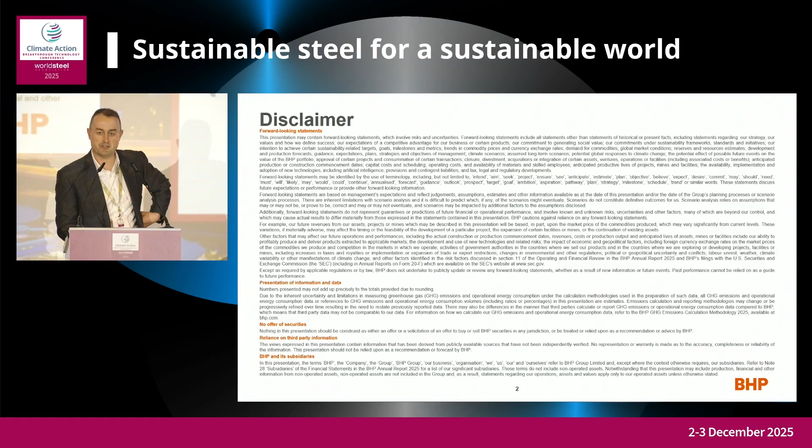In terms of why BHP is involved in steel decarbonisation, we see that we have a contribution to make as a reliable, sustainable, and important supplier to the market. We have a role to play. We have a deep understanding of how iron ores and steelmaking coals perform in the iron making and steelmaking process. But at the end of the day, we're not a steel producer, so we can't actively or directly influence steel production emissions. So we are taking a partnership approach, and we have a way to contribute to these reductions in steelmaking emissions downstream in the value chain from our operations.

So we've set 2030 goals around supporting technologies, developing technologies, and working with our partners to show how we can de-risk and support commercialisation, which is probably going to happen post-2030. We also have a 2050 goal in the steel value chain, which is more directional. But importantly for BHP as an iron ore and steelmaking coal supplier, we want to understand the technologies that our customers will be using in the future and how to keep our raw materials relevant and value-adding in our customers' processes. So to work on this, we've structured a program that you can see laid out on the right-hand side. The partnership theme sits across all of those approaches.

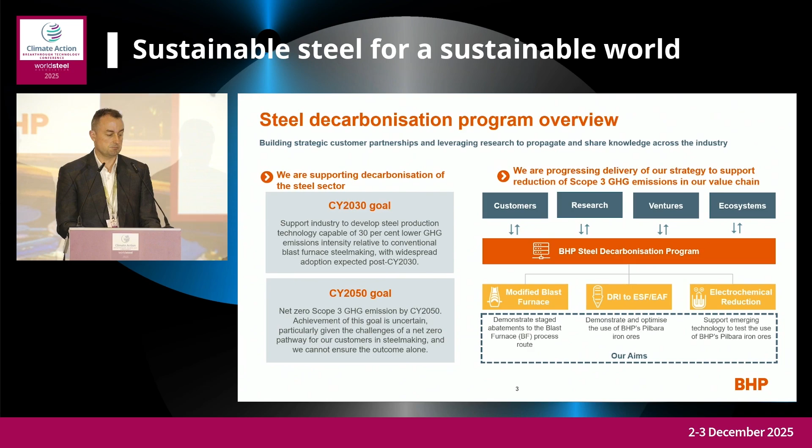In terms of those pathways in a little bit more detail, we have basically broken them down into three categories. The modified blast furnace, which is decarbonising the existing process route through the use of CCUS in particular. We have the combination of direct reduced iron using our Pilbara iron ores and electric furnaces, particularly the electric smelting furnace, which you've heard a lot about. And lastly, the electrochemical reduction process route, which is more transformative, probably longer term, but we really see it can play a role, particularly if you consider these multiple pathways have different economic pros and cons in different regions with different contexts around energy, raw material mix, and regulatory environments.

So I think it's been really pleasing to see that multiple pathway thinking across the last couple of days, and our program is certainly set up to reflect that. And we see all of these pathways have that roadmap towards a near zero CO2 intensity of steel production. So it's not necessarily trying to achieve zero. We've got to recognise there are a lot of residuals that have to be worked on, but really getting down to what we see is 0.4 tonnes of CO2 per tonne of steel.

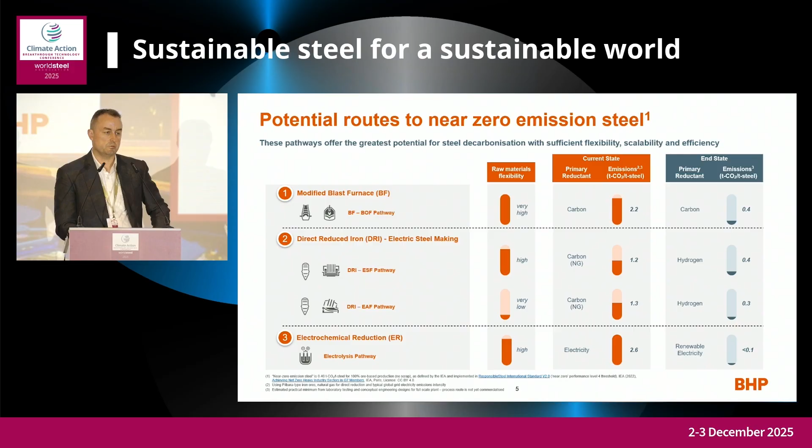And since we've set up the program in 2020, we've gone through phases of setting up partnerships, doing studies, doing lab test work, programs, and really maturing the program across those three pathways. And in some cases, particularly in the optimization projects shown across the top for the blast furnace, these projects are at commercial scale and delivering real emission reductions with our customers who are hosting the projects.

And that's why we build in the longer term demonstrations that are at pilot scale or smaller scale, like CCUS, and like the DRI work and the electric smelting furnace, which we're working towards pilot scale at the moment. We've also been working in electrochemical reduction to scale up different systems with our partners and understand the pros and cons of those different systems and the performance of our iron ores.

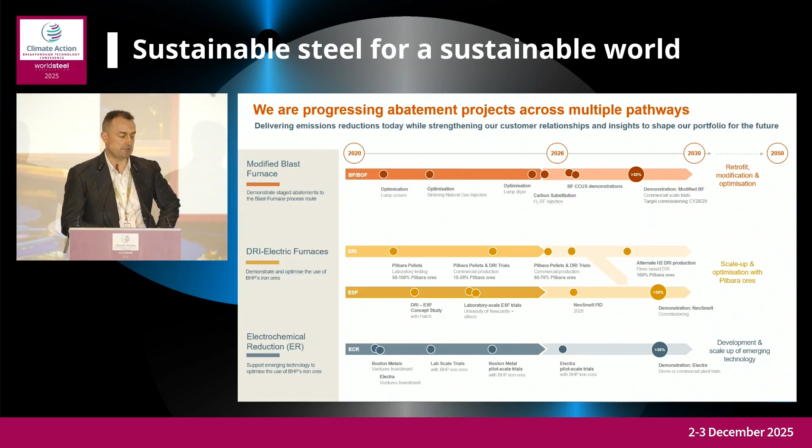Going into a bit more detail on some of those projects. For the blast furnace, I think this is now becoming a common understanding that the blast furnace pathway to that near zero intensity has the combination of technologies which include increasing energy efficiency, raw material blends, which includes higher quality coke, the greater use of lump and potentially pellets over sinter, to really step down that emissions by 10 to 20%.

Then you have the recycling or carbon loop effect of the top gas recycle back into the blast furnace to step down even further to about 50% reduction. But to really get down to that near zero intensity, you need the carbon capture and utilisation and storage. And within the integrated steel mill, there's multiple point sources that you can apply that to. Each have their own profile in terms of gas composition, impurities, and different technologies may or may not work. So it's important to understand where those point sources are and the cost and the risks around applying those.

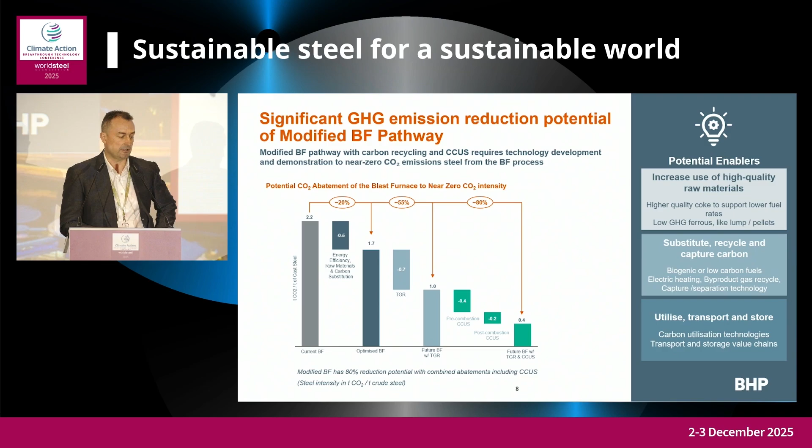We also have been doing research with our University of Newcastle team to look at if you're injecting hydrogen into the blast furnace in different stages there, what impact does that have on operations? So building more models to understand where the operating environment might be best for hydrogen, looking at the materials performance of coke and ferrous under hydrogen environments, and then trying to validate those at commercial scale through our partnerships with our customers. The example shown here is the Zenith project in China for coke oven gas injection.

And some early learnings coming through is really that high quality coke can play a key role in resilience against hydrogen attack. And then there's some trends in the ferrous burden RDI that we're seeing around the impact of hydrogen on pellet degradation versus sinter and lump, but we've got to understand that a bit further. Ultimately, we see the raw materials will play a role in decarbonising the blast furnace, and high quality coke is going to be very important as you're trying to reduce fuel rates significantly. So understanding the performance of that coke and the coals that go into it and how you generate that quality is important.

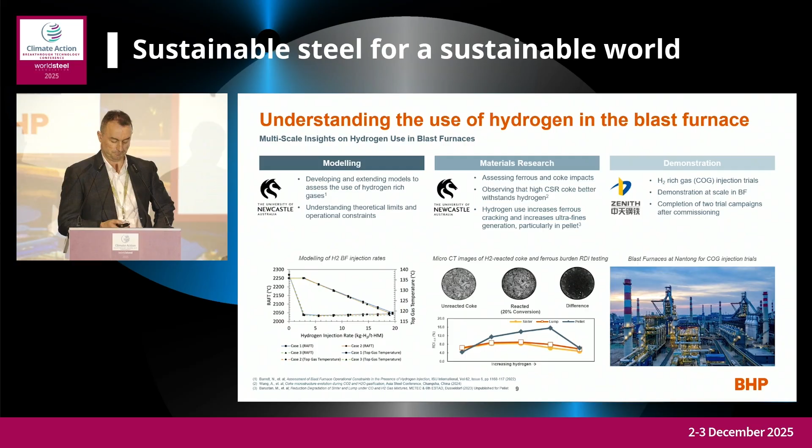Dipping into that Zenith project a bit more, we've got some initial results. The coke oven gas injection was constructed and commissioned recently after about a 12-month period. The initial trials being run by Zenith are very promising. We're seeing the coke rate coming down a bit and obviously leading to CO2 benefits. But it's still early days and they're still doing more trials to optimise that further around the application of which tuyeres and the injection approach as well. So hopefully with them I'll be reporting more results in the coming months around that project. But it's a good example of that real reduction in CO2 happening with our partnerships with the customers.

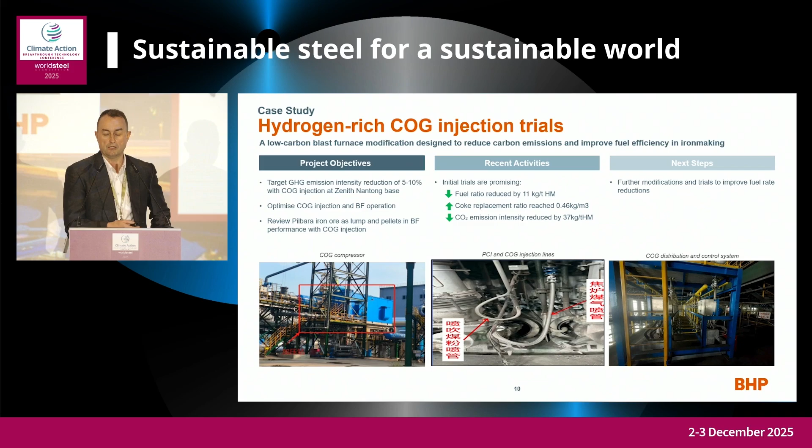In terms of carbon capture, I don't think anyone understands yet which carbon capture technology might work best with different point sources in the steel mills. So we're really looking at a range of technologies in our portfolio and at a range of different scales, trying to answer different questions, essentially.

So if we take the example of our project with ArcelorMittal and MHI at Ghent, it's a small pilot, but it's using conventional amine technology, which is proven at scale, but in chemicals or cement plants or power stations, not at the steel plant. And so we're really trying to understand the performance of the blast furnace gas capture with that technology. So it doesn't need a big plant, so it's very focused.

And we're hopefully going to be reporting some outcomes for that in the coming months. With HBIS, we have a slightly larger plant looking at PSA, again, a different technology, seeing how it can perform with the blast furnace gas. It's not just the static composition or the average composition, it's the impurities and the minor components of that gas, but it's also how it fluctuates during production periods as well that has impact on potential capture. And we're looking to really understand that.

Larger scale with JSW and Carbon Clean in India, we're doing a study at the moment for a larger plant. They're lucky enough in that region, there's a market depth for the captured and processed CO2, so they're able to look at a larger scale module there, and really that'll be a lead project for the industry, and potentially innovative carbon capture amine technology with a CycloneCC provided by Carbon Clean.

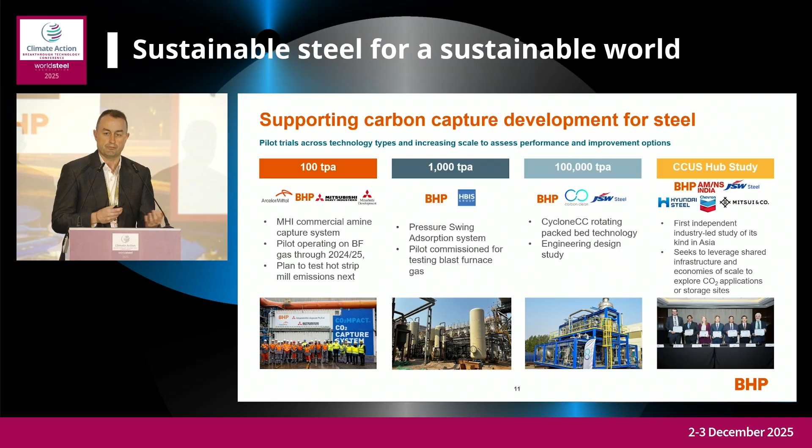So this hub study is helping some customers of ours in Asia really prioritize where those storage options might be and what levers are needed or what instruments need to be developed to improve the economics of that for CCUS to be a solution for the industry.

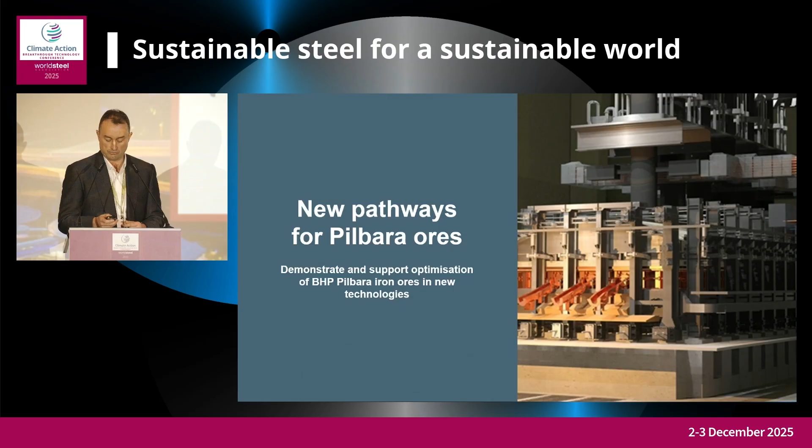I think as iron ore suppliers, we'd love the beneficiation to work, and we're always going to study new ways of doing that. But the reality is the gangue minerals are so well integrated into the iron matrices that you just can't liberate it. And you can spend a lot of energy and use a lot of resources to try and get rid of that. But ultimately, you're fighting nature there. So, of course, we'll keep looking at it, but this is the reality that we're dealing with.

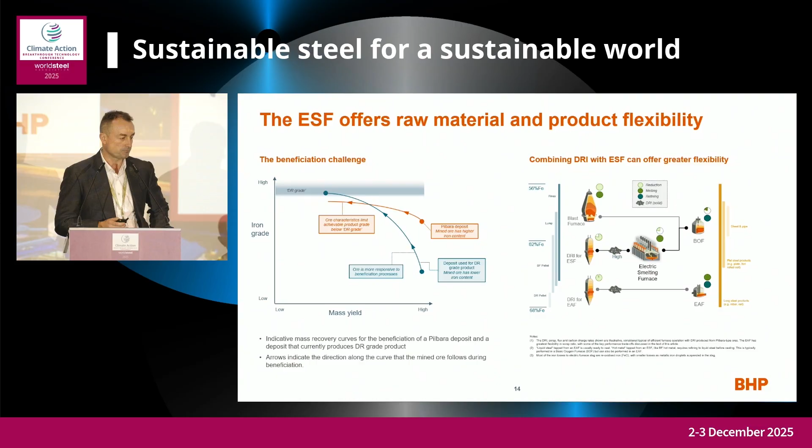There was some conversation in the last discussion around pelletizing, and we have been doing a lot of work around this. 5 years ago, we were told, and we had the same mindset, Pilbara iron ores can't form pellets. And there are some constraints, but like sintering, which has been the long mainstay of the process for the use of Pilbara iron ores, there are ways to improve the performance. And actually, we find that the steel producers in China are more readily growing the use of Pilbara iron ores in their pellets as a blend material.

Up to 40% in blast furnace pellets is kind of normal for some of our customers now. And we're really trying to work to understand how to increase that ratio through pilot testing and then into commercial trials.

Some of the things we're learning, touched on earlier, is that the actual pellet grade on Pilbara iron ores achieves around 63 to 64% iron once you get it into the pellet, because you're losing that hydration water in the agglomeration process. So you get a concentration effect of the iron going from a Pilbara iron ore to the pellet. That's important, it's a simple concept, I think everyone should know it, but it gets lost in the noise sometimes.

Pilbara iron ores are easy to grind, particularly with dry grinding compared to other iron ores, and have good balling characteristics, generally with lower binder consumption. In terms of optimization, we've got to work hard on the induration temperature profile, the fluxing, and which blend partners to use. We haven't fully worked that out yet, but we're having success going from 10 to 20%, which we believe could maintain reasonable EAF production while blending our iron ores into the pellet.

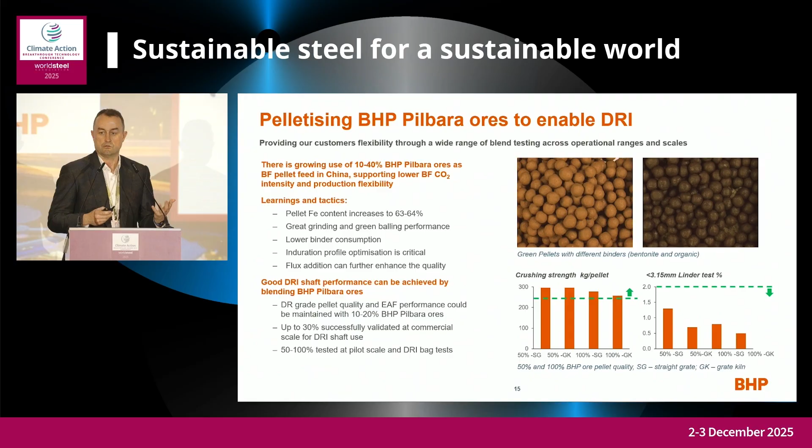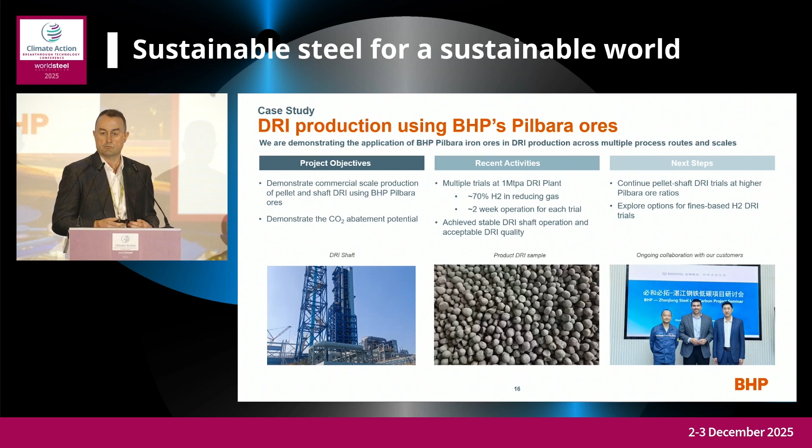In terms of those DRI shaft trials, we've been successful working with our partners in China to complete full-scale tests around two weeks at a time using Baowu's Zhanjiang Steel, which is around 1 million tonnes per annum scale. Basically using a pellet blended with different hematite and magnetite with our Pilbara iron ores, the DRI shaft operation was smooth, DRI quality was good, and it was able to be blended into the BOF with hot metal and scrap. So a good outcome, and the next steps are to take that Pilbara ratio higher in the pellet and then do the same sort of commercial scale trials.

In terms of the electric smelting furnace work, we started lab work. We saw the opportunity to start characterising and understanding the system. So our team at University of Newcastle in Australia set up lab facilities to look at the performance around the electrode, at small scale around 5 kilo batches, learning a lot around how the formation of metal and slag, how elements are partitioned, and the deportment of carbon into the system. It's an ongoing process, but it's really helping build that understanding, not only of the system and how that feeds into pilots and larger scale, but also the experimental technique itself.

Developing those analytical approaches is really important. We found some of the facilities these guys have been working with don't have the capability anymore because the investment hasn't been there for the last couple of decades. So we're really trying to help build up that capability.

In terms of other activities, we're involved in the NeoSmelt project, which Chris Page spoke to earlier. That's a key flagship project for us in terms of taking it to the next scale and learning more about which forms of DRI, where it's charged, how you achieve the metal and slag outputs, and then how the larger operation performs. We're also advocating for DRI-ESF technology through programs in Australia like the HILT CRC and others. We're really trying to build a program which supports different scales and understanding different elements of the process towards commercialisation.

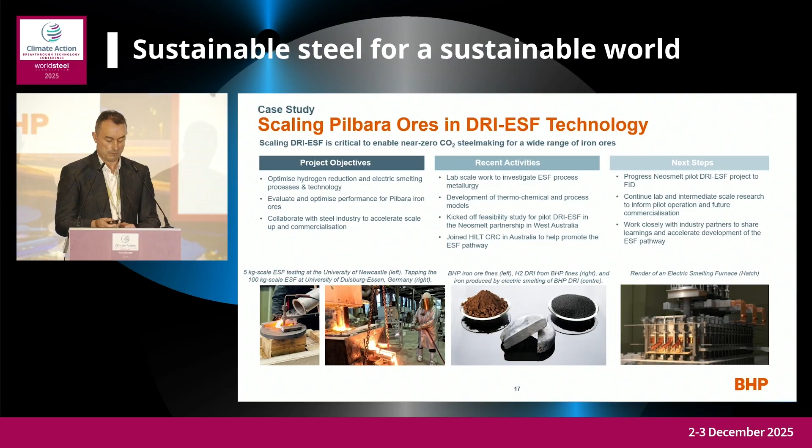Lastly, on electrochemical reduction, we're participating as investors in Boston Metal, which is molten oxide electrolysis at high temperature, and also Electra, both of these in the US. Electra is at low temperature. We also test other systems where we're looking at molten salt electrolysis with the University of Newcastle. We're trying to understand how those different systems perform and their potential pathways to scale.

I think particularly with Boston Metal and Electra, we see that there are analogues. Boston Metal is similar to an aluminium smelter, obviously at a lot higher temperature, but you can conceptualize that it can play a role in mainstream steel production in the longer term and maybe open up new markets and geographies for steel production.

Electra is a bit more like copper electrowinning, and we could see that something like that might operate more efficiently in a remote location compared to an integrated steel mill or a fluid bed DRI furnace. So we'd really try to understand the pros and cons of the different systems and, importantly, how our iron ores perform in those as a feed material. So far the lab scale work is really, really promising and we're looking to continue that work.

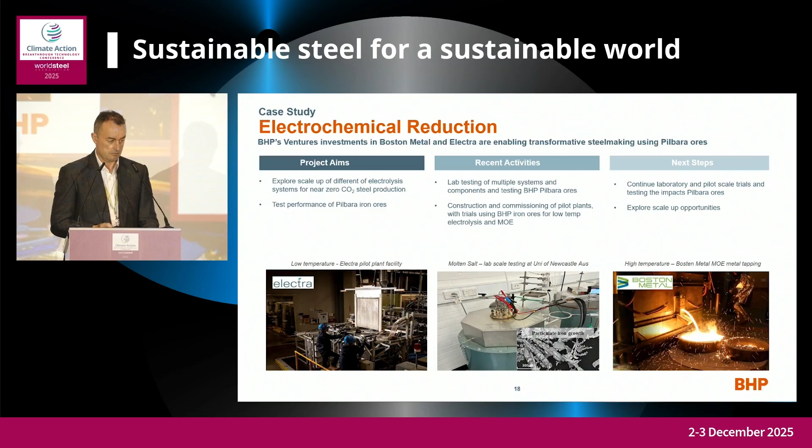So just to wrap up, BHP is participating as a value chain player in the decarbonisation of steelmaking. We see multiple pathways, there's no single solution. I think that's an important message that's come through these last couple of days, and it's really pleasing to see that we have aligned views on that.

Some technologies are closer to deployment, and we're working with our partners to demonstrate those potential reductions to the blast furnace, but also looking to the future and doing pilot work with our partners on CCUS and hopefully in the future, top gas recycle. And we're also looking at these new processes and how our Pilbara iron ores can play a role.

We see that partnership is really essential for this process, and BHP is looking to play our role and support the industry in de-risking and understanding the technology and the developments that need to happen, and how they can be optimised as our customers seek to build these processes into their roadmaps in the future. Okay, thanks for your time.

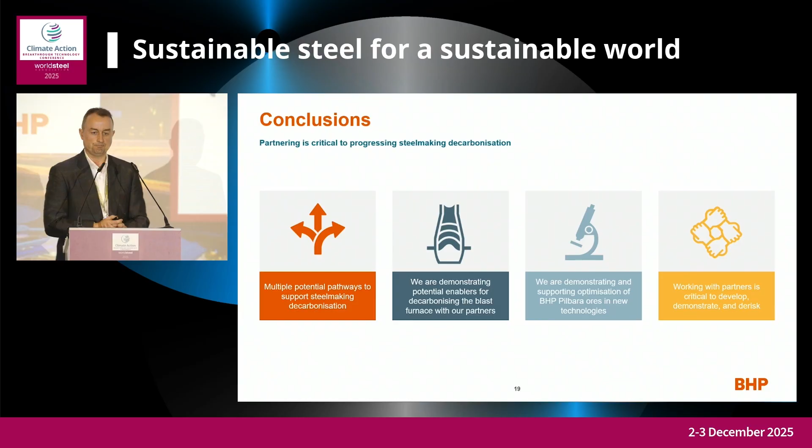Nigel, quite an extensive decarbonisation portfolio, I should say. Yeah, we have a lot of projects. Actually, focus is really important because there's multiple pathways, but there's a lot of variations within those, and we have to really focus on what's going to be suitable for mainstream steel production. We're a large producer, we can't be playing around on the edges on too much stuff because what we look at has to be suitable for hundreds of millions of tons of steel production, essentially. And that's how we help focus.

Yeah, and also quite impressive progress so far as I can see. Yeah, so far so good, but it's all about the partnership. Yes, the key word is partnership. So, any questions for Nigel, please?

Thanks a lot, I have some questions about slide 8. So it was about the progress that you're doing in the blast furnace. I'm really happy to see that blast furnace is not so demonized anymore. So you mentioned that with top gas recycling, energy efficiency, raw material improvements, and carbon substitution, you can reach around emission factor 1? Yeah, that's what we estimate.

I think Scope 1, 2, 3? Yes, yes. Okay, and which is the TRL of this process right now? So the TRL is actually, I think, almost commercial, because you have Baowu working on the HyCROF technology, which has been operating at a 400 metre cube blast furnace in Western China, and I think trialled on a larger blast furnace in the same location. So we feel quite confident that that process can work.

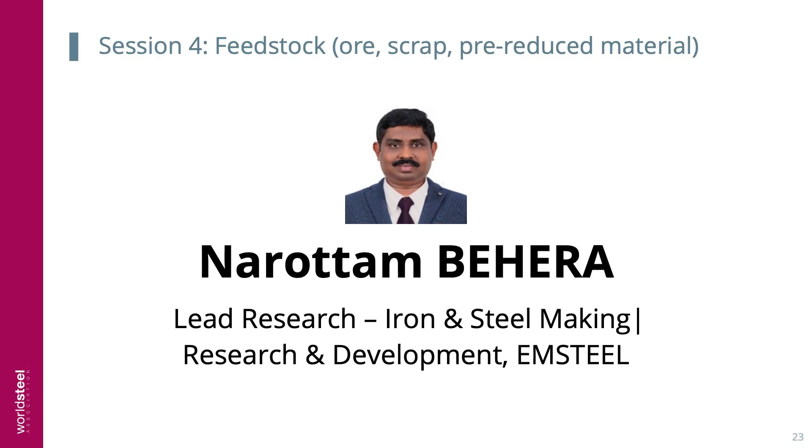Thank you, Chairman, for a nice introduction. Thank you, World Steel Association, for giving this opportunity to present our work. This is an AI-driven optimization framework for EAF operation.

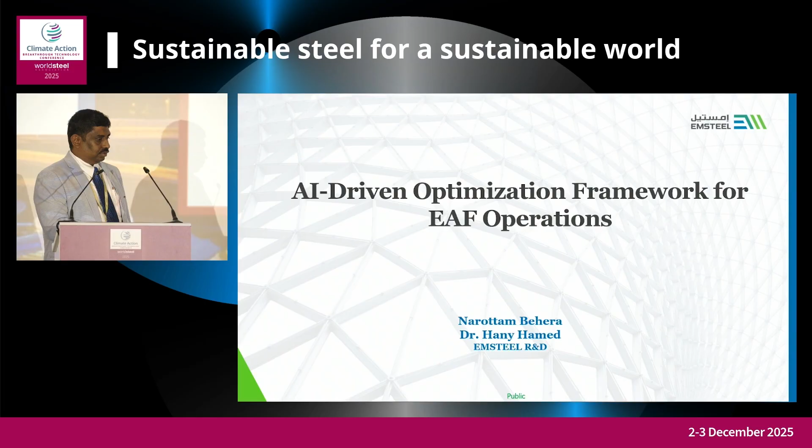I will give a brief introduction about EMSTEEL. EMSTEEL has a DRI-based EAF, and we have 3 electric arc furnaces: 2 of 150 tons, 1 of 55 tons, and we are producing rebar, wire rod, heavy section, and sheet piles.

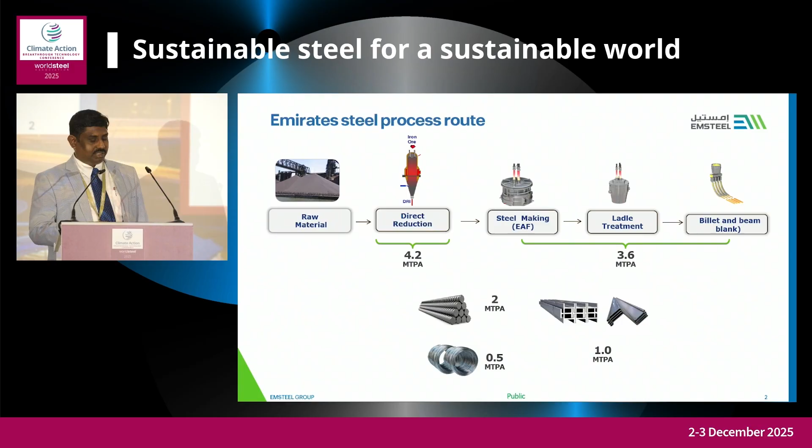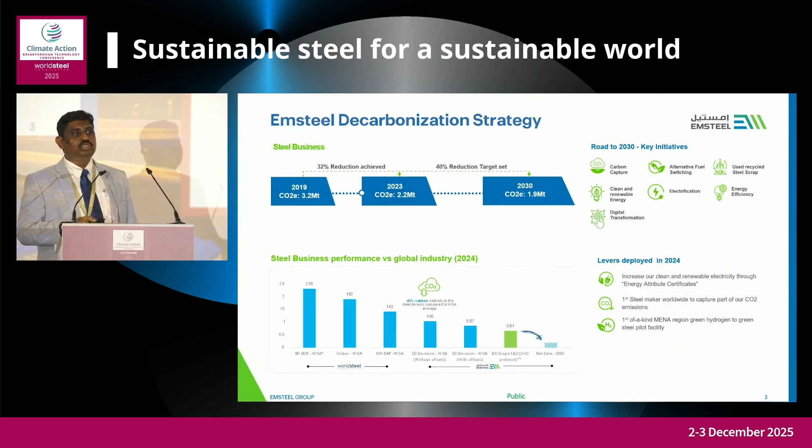I will give the overall decarbonization strategy of EMSTEEL. EMSTEEL is a leader in decarbonization strategy, and we also received an award from World Steel. We have reduced our CO2 emissions drastically and have a very challenging target. We are planning to reduce our CO2 emissions by 2030 to around 1.9 million tons total absolute. Currently, we are far below the World Steel average, which is around 0.97, and if you consider scope 1 and 2, it is 0.67. We have a challenge to reach net zero by 2050. We have done several things: increasing renewable energy, implementing the first worldwide CO2 capture, and also the first MENA green hydrogen pilot project. Now we are working in several areas: electrification, energy efficiency, digitization, and use of recycling of scrap, to further reduce CO2 emissions.

I will speak in more detail about the electric furnace and how we are optimizing it. In the electric furnace with DRI, there is a current challenge: we have a DRI furnace producing 250 tons per hour, and an electric furnace of 150 tons. We are continuously feeding hot DRI, and the capacity of the transformer is 130 MVA. Our tap-to-tap time is around 40 to 50 minutes. The current challenge is that there is no real-time DRI analysis, and we also don't have continuous bath temperature measurement.

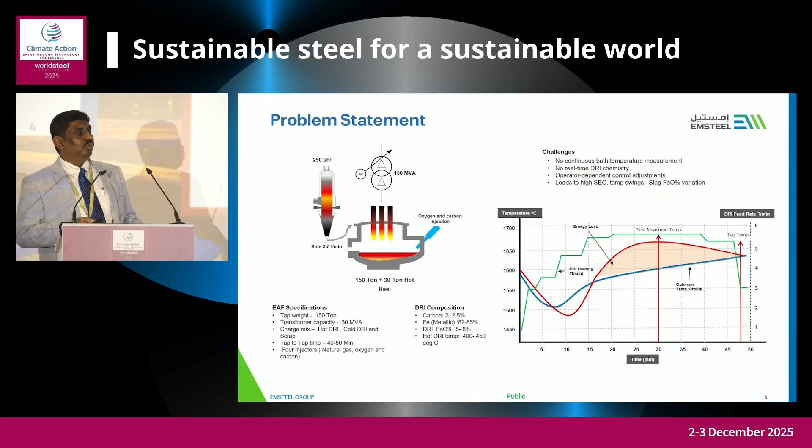So here the idea is how to optimize this and what things need to be done so that we have an optimized process. I will go into more detail about the modeling. Initially, in the 1970s, we started with the modeling of the EAF. Then we started the CFD era, which is ANSYS, Fluent, and other things. After that, from 2010 to 2016, we have comprehensive heat balance and mass balance models. Then we have hybrid models. Now the era is machine learning.

Even with machine learning, we have a lot of challenges, because a lot of machine learning models are black box models. They are not explainable. Another thing is that machine learning will predict, but there is another challenge of optimization with the controllable variables. That's why now the era is hybrid modeling, where you mix machine learning with the physical model and fine-tune the physical model using machine learning to optimize.

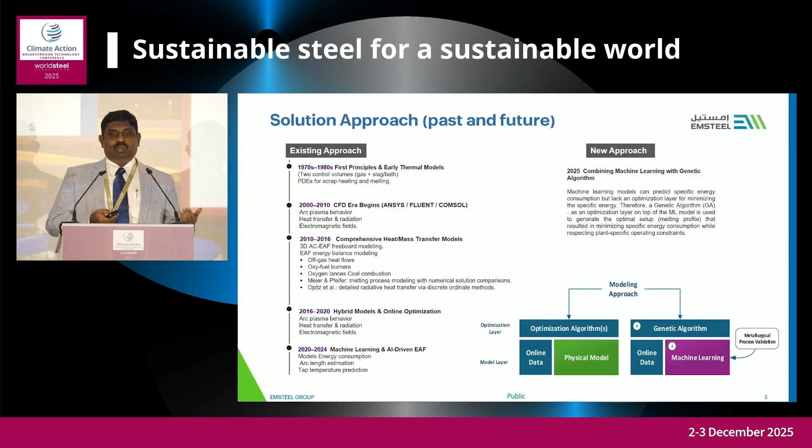Then there are different optimization algorithms. In my study, I am using the genetic algorithm, and we will go into detail about what a genetic algorithm is. Hybrid modeling is basically a combination of a machine learning model and optimization using a genetic algorithm. So it will be real-world data-driven modeling with an implementable process, which is a flexible and sustainable process.

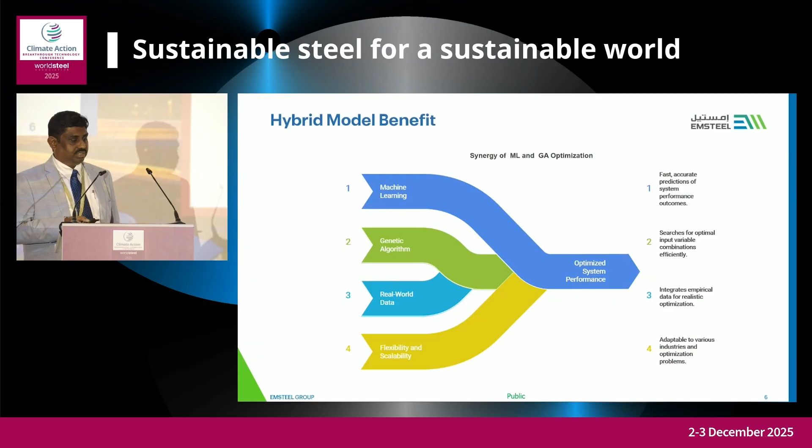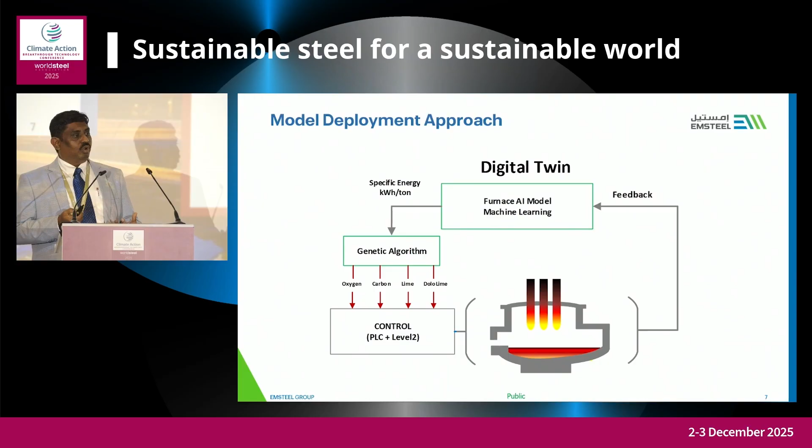So how are we going to deploy this? Because we already have a digital platform, we want to deploy our machine learning models in our digital platform. We have PLC level 2 data and EAF data, which is time series data. We are connecting to the furnace. Then we are putting our machine learning and optimization model in to control the controllable parameters. This is our main aim. Though we are making the model with more variables, we are only trying to control the controllable parameters where we can achieve the benefits.

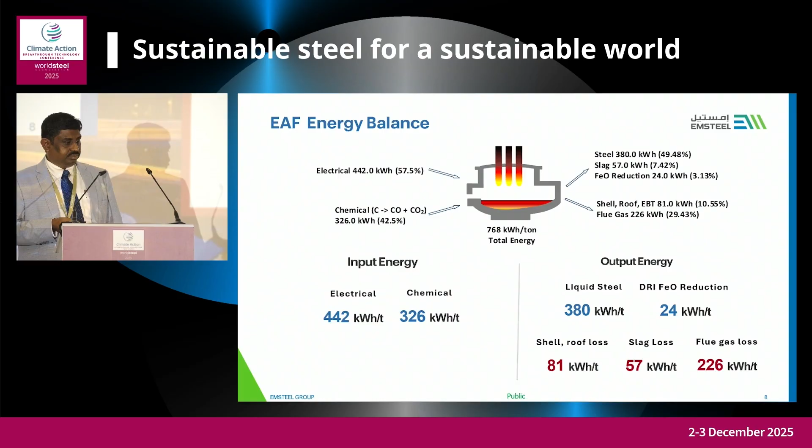I will go into more detail about the machine learning model design. We collected the data, because DRI furnace data is not online. We aligned the lab analysis with the respective electric arc furnace heats, because lab analysis is not continuous. DRI is a continuous process, whereas the electric arc furnace is a batch process. So we aligned both the data. Then we did the data processing and data removals. Then we used different algorithms like linear regression, decision tree, support vector, Gaussian process regression, kernel, and artificial neural network.

Then we evaluated each model. After that, we analyzed the R-square, which is the coefficient of determination, and root mean square error. We compared the performance of each model. After comparing the performance, we validated the model performance against the metallurgical process variation. Though some of the models have higher accuracy, they do not follow the physical phenomena.

So we are not considering it as the right model. We are combining the machine learning model performance with the metallurgical variations, then considering it as the best model. Then after developing this model, we are putting in an optimization algorithm, which is called GA, genetic algorithm, to optimize the process to minimize the energy.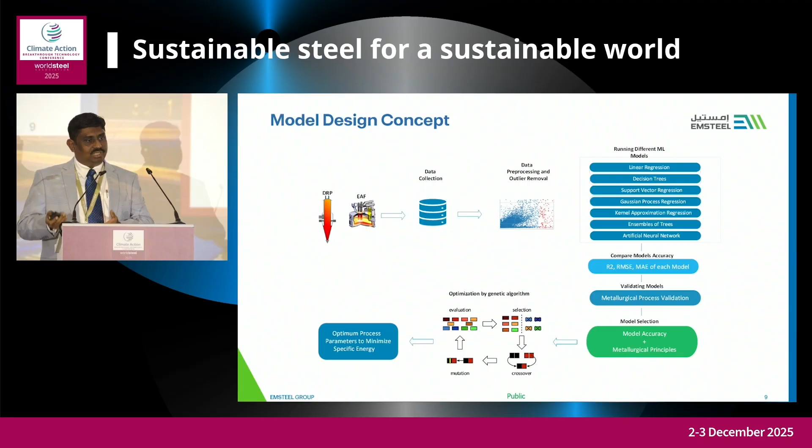We take parameters, like in the electrical furnace, we have 4 controllable parameters: oxygen injection, carbon injection, lime and dolo lime. Whereas the DRI that is coming is not in our control. So we are maintaining the DRI quality. What are the best parameters to optimize the energy, minimize the energy?

That we have done. Then if you see, we have run different feature selections, which is a machine learning tool, like MRMR, R-square, RReliefF. Then based on these machine learning algorithms, we compare the best performance of the features which are impacting the process. Then we also validate these features against the metallurgical process.

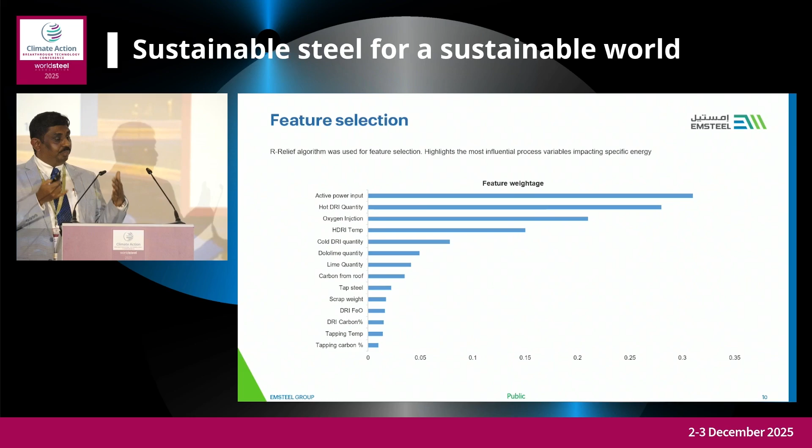Like in the electrical furnace, active power is the most important factor to control the energy. Next, the hot DRI temperature, hot DRI quantity, and our oxygen injection. These are the most important parameters controlling the energy. So though we run different feature selections as per machine learning, we validate with the metallurgical process which is the best feature selection suitable for the process. So we choose RReliefF.

Then this is the comparison of the different model performance. If you see here in both cases, arcing time predictions and energy prediction, Gaussian process regression has higher R-square, low RMSE and MAE. So that indicates this model is validated with a higher accuracy level.

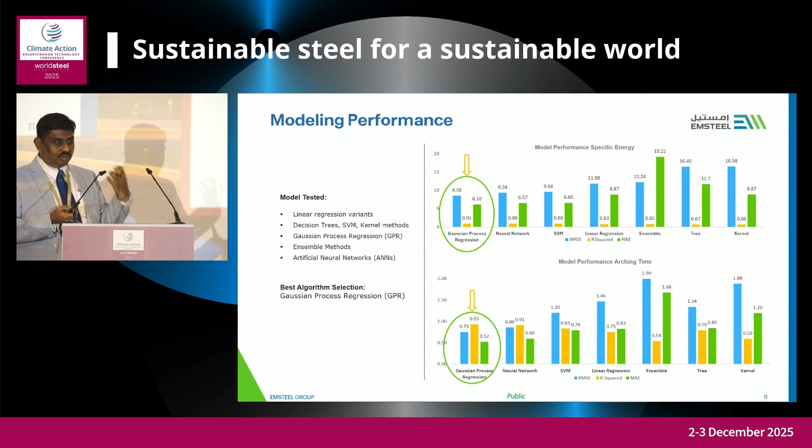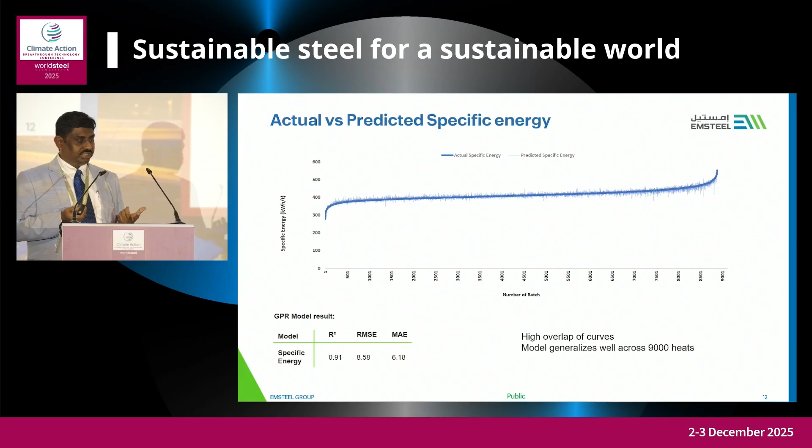Then if you see, this is the actual versus predicted specific energy. We have plotted the S-curve. What is the benefit of plotting the S-curve? We want to capture, even in minimum and maximum positions, whether it follows the trend or not. So this model has R-square 0.9, which is very high accuracy, and it follows the trends of the actual measurement.

Similar thing we have done for the arcing time predictions. It follows the arcing time. If you see actual and predictions, it follows well, and we have done this for 1 year of data analysis, which is around 9,000 to 10,000 heats.

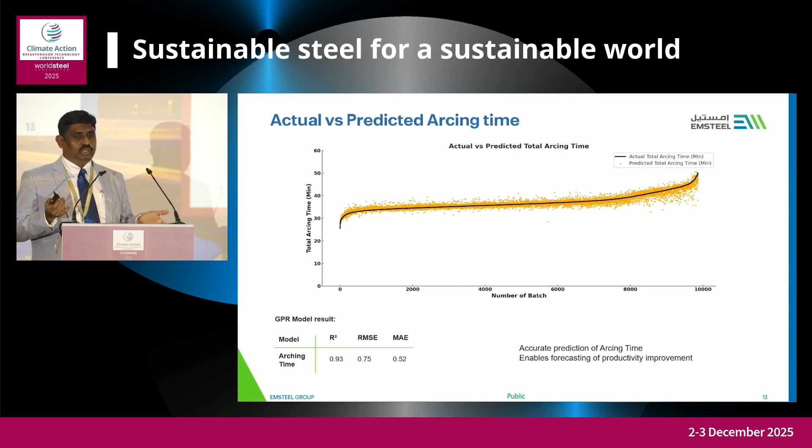This we have also done for the slag chemistry predictions, because we are not analyzing the slag chemistry for each heat. With the heats available for the 1 year data, we have done the model for the slag chemistry predictions.

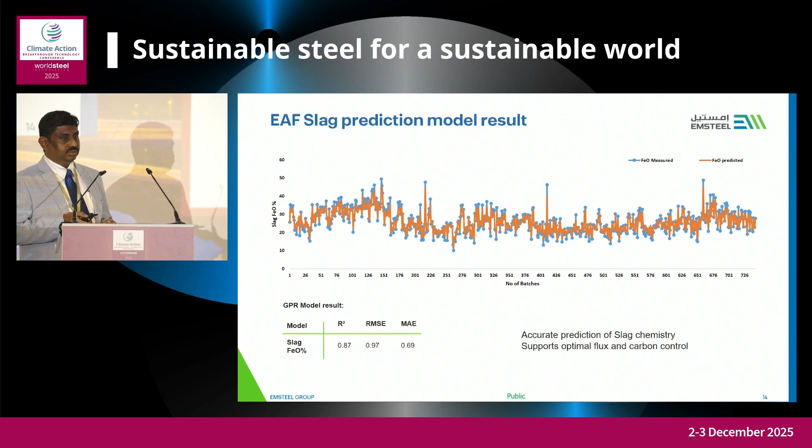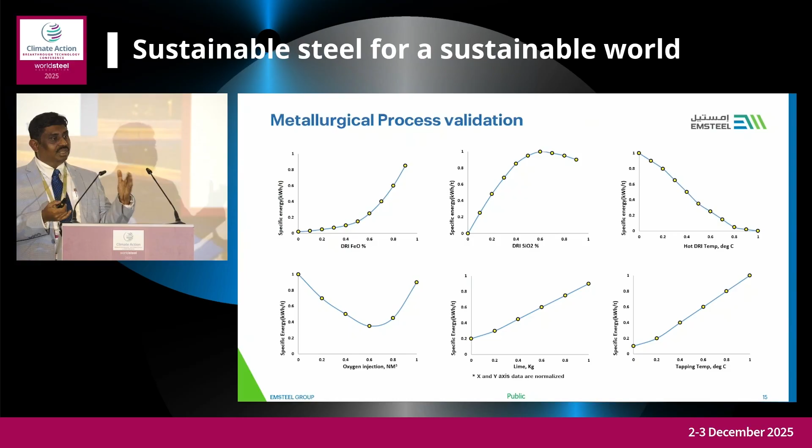Whereas in the oxygen injection system, if you see, this is a plot where after some point it has a negative impact on the process. So if you are putting excess oxygen, it has a negative impact. It reduces the yield, it gives more oxygen ppm, tap oxygen, which has an impact on the ferroalloy consumption. So those are negative. The model is capturing the physical phenomena of the process.

Then we will go to what a genetic algorithm is. Genetic algorithm is based on the Darwin theory of natural evolution. The genes of the parents go to the next generation; the best genes transfer to the next generation. This theory works like this. So the first step is initialization. We have to set the population size, how many genes you are considering, what the crossover factor is, and what the mutation rate is. So these are basically evolutionary optimization techniques based on the Darwin theory.

Where we are considering a fitness function. What we have done here, the model we developed is considered as the fitness function to predict. After that, suppose we have considered 8 input parameters in the model.

Out of this, some parameters which are not controllable, we consider as fixed variables. Parameters which are under control by the operator, we consider as variable parameters. So we put the same minimum-maximum range of the optimized values to run the genetic algorithm to minimize the energy. And here, if you see, this will optimize the oxygen injection rate, carbon injection rate, lime and dololime injection rate to minimize the energy consumption.

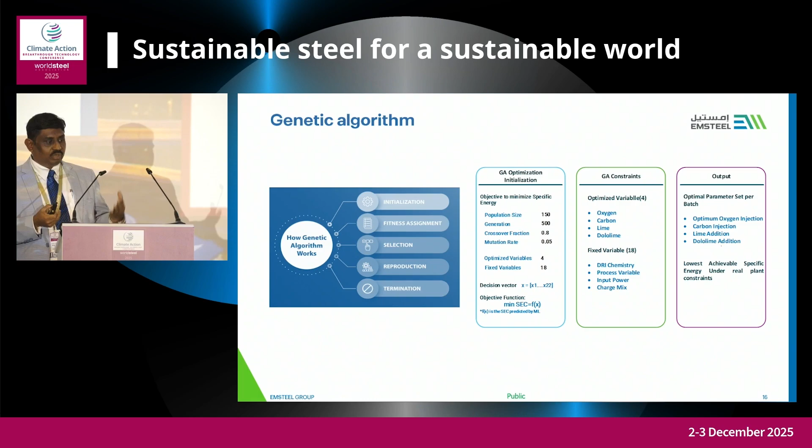It runs more than 500 times in one hit to reach the global minimum. There are two types of minimum: local minimum and global minimum. Some optimization algorithms get stuck in the local minimum, whereas this genetic algorithm reaches the global minimum. So that means it is an algorithm which can solve complex problems. So if you see, the GA did not get stuck in the local minima, it keeps to the global minima.

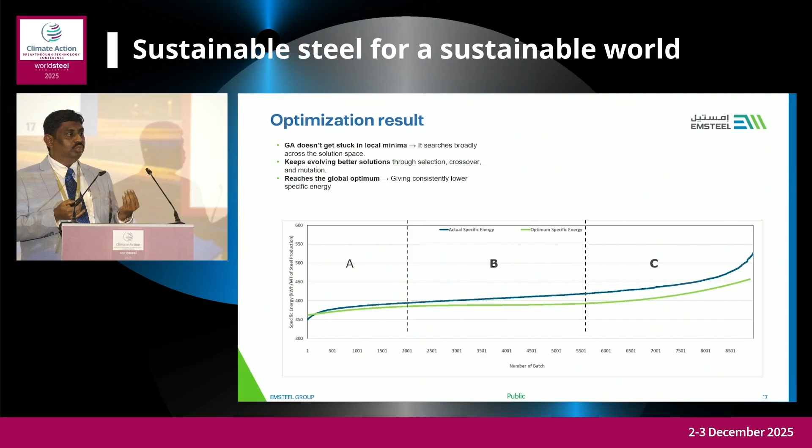And here, in the result, we divided the result into actual versus optimized. In some of the cases, the GA does not reduce because it is already optimized. In some of the cases, it tries to reduce the energy, and based on the energy reduction, it selects which of the 4 controllable parameters will reduce the energy.

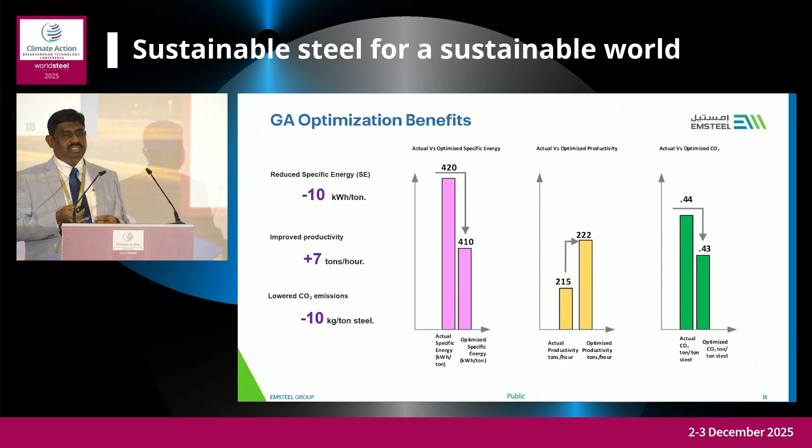Then after this result, we considered the whole year data, and we are able to reduce around 10 kWh per ton of steel, and 7 tons per hour productivity, and converting to CO2 emissions based on the country's kWh to CO2 factor, it is around 10 kg of CO2 emissions reduced per ton of steel.

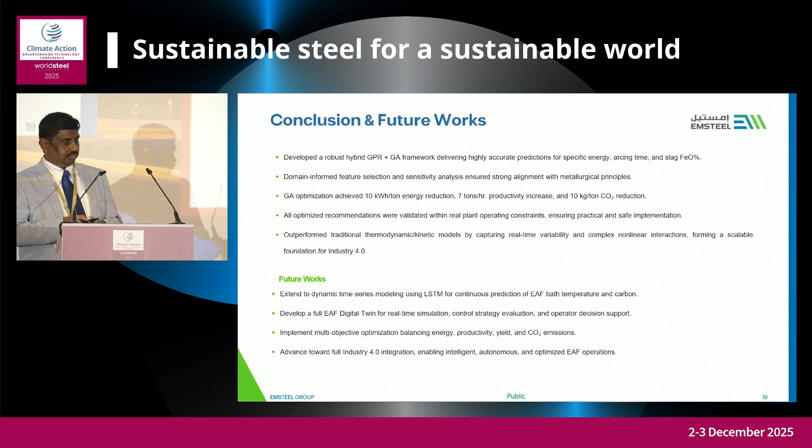Then we are developing a digital twin considering temperature prediction, carbon prediction, and tapping oxygen ppm. We are also working on multi-objective optimization. What we have worked on till now is a single-objective optimization problem. So we are trying to do multi-objective optimization where we want to consider three things: energy, productivity, and CO2 emissions. We are working on this problem, and this will help the industry with integration. And this is the reference. Thank you for your time.

Narottam, thanks so much for the impressive presentation. Quite intensive digitalization and modeling work done at EMSTEEL. So any questions for Mr. Behera? So perhaps I can kick off the questions. In your experience after all this intensive work, what are the key factors to the success of this line of work? Is it the sensors? Is it the modeling know-how? Which factors? A key factor here is data.

Because with modeling, if you have real data and the right data, then it is very easy to implement, and the right platform to implement. Two things. The modeling part is okay, but the most important thing is data. If you have a proper ecosystem where you can collect the right data, and a proper platform, then whatever machine learning or physical model you are developing will be implementable.

So we have done most of the investment to have digitalization, where we are collecting most of the data on a real-time basis. We have installed iba servers in all the plants and energy meters. And at the same time we also invested in the Siemens Edge platform where all the digital models could be implemented. So these are the two key factors to have digitalization. Thank you. Impressive. Any other questions for Mr. Behera?

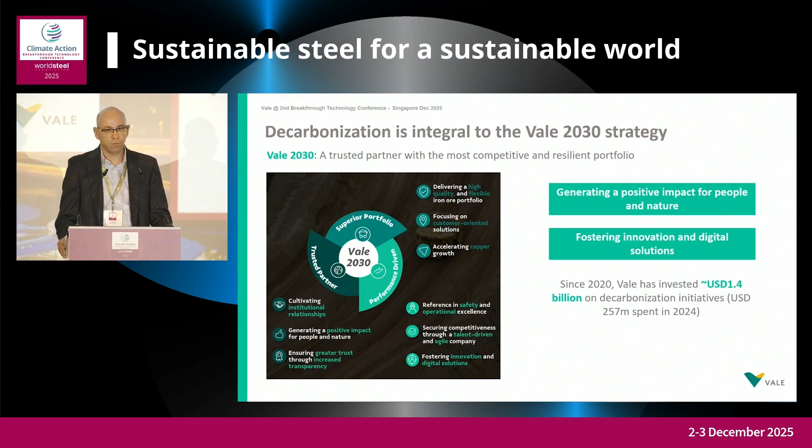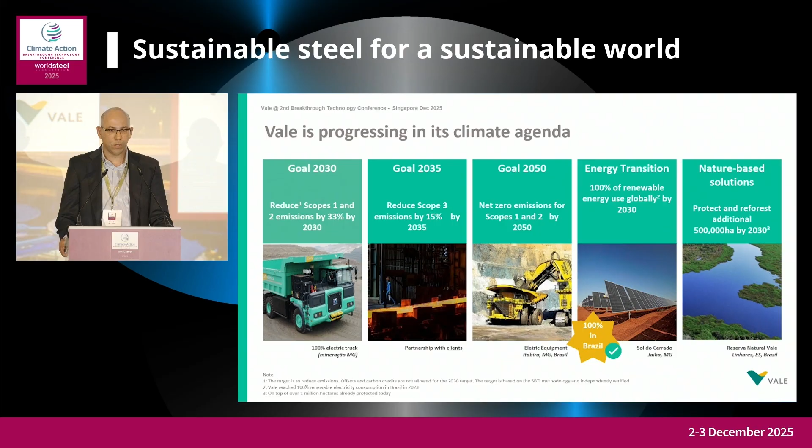And for the nature-based solutions, we have almost 220,000 hectares of forests protected and reforested, on top of 1 million hectares that we already protected in Brazil and in our operations.

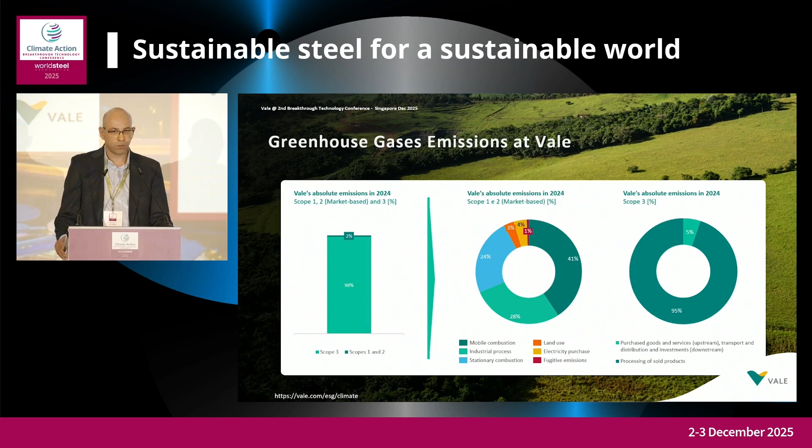Looking at scope 3, 95% is related with our products, the products we sell to our clients, and 5% is upstream and downstream operations, and shipping is 3% of that. And we'll talk later in more detail about that.

Before we go to shipping, I would like to highlight how we are organized and how we approach innovation in Vale. Today we count on more than six R&D centers for iron ore.

We have more than 500 R&D and innovation projects ongoing in the company. A big part of those projects we do with universities and in partnership with companies. And we also have 15 innovation hubs, connected with our operations to support them with methodology, with connections with externals, to have a different approach for innovation.

We organize these 500 initiatives in 12 innovation programs that cover all the value chain, from exploration to operational asset management. So we cover all the value chain. And as you can see, we have two focuses here on decarbonization: Ecoshipping, that we will talk about later, and also decarbonization solutions that cover scopes 1, 2, and 3.

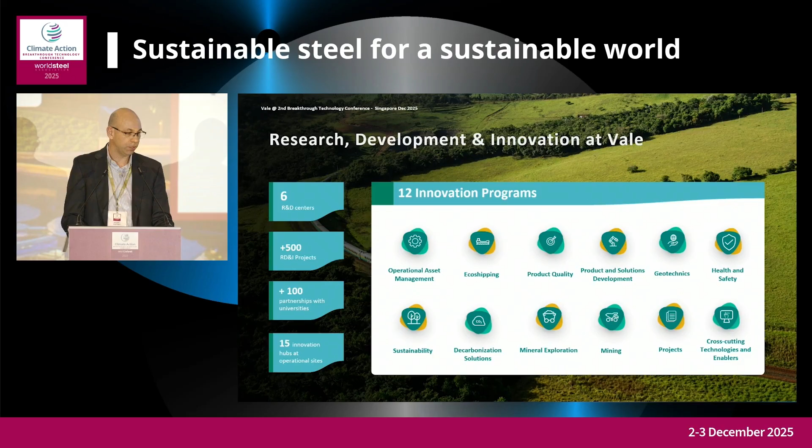Talking about the decarbonization solutions program, today we are mainly focused on alternative fuels. In Brazil, we have a good opportunity for that, but we also work on this for shipping, electrification, and adoption of low-intensity technologies and fuels. For Ecoshipping, we are also working on this area, but I will hand over to my colleague here, Michelle, to present and detail what we are doing on this important program.

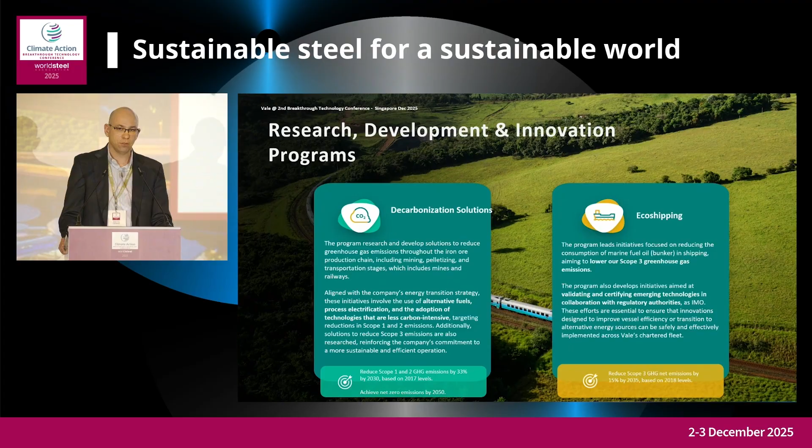Okay, thank you. Thank you, Alexandre.

Good afternoon. Just to go straight to the point, what is the Ecoshipping program at Vale? It is basically a program focused on the shipping business, which is the main supply chain for delivering the product to the clients. It focuses on innovation, reducing the utilization of heavy fuel oils and accelerating programs that focus on energy efficiency of the vessels.

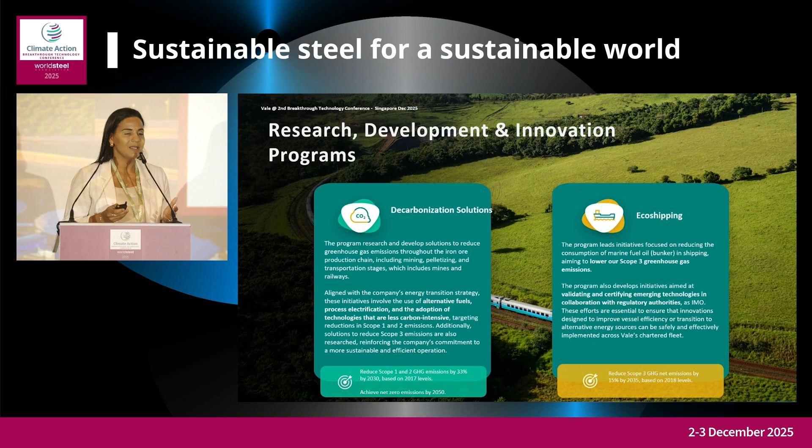So the Ecoshipping program has the main focus of capturing innovation and testing, verifying, certifying together with several institutions, basically to accelerate what the industry needs to move forward. Why do we focus on that? Why is that so important to us? Because of the map. Our supply chain is one of the most complex. We are very far from most of our clients, and it means we have to use innovation. Innovation is a crucial element for our competitiveness.

The map shows how we position ourselves in South America and distribute to several different points in the world. Shipping, of course, participates in Vale's Scope 3, and the initiatives are fundamental for Vale's global decarbonization journey.

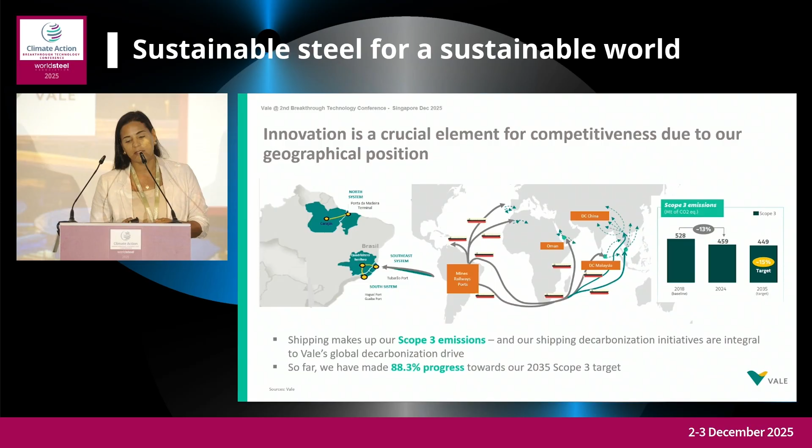Now we're talking much more about the Ecoshipping program, but this journey started long ago, over 15 years ago, when we delivered the first vessels in 2011, nowadays called the Valemax. The first generation of those vessels came with a reduction of 35% of CO2 emissions, which is pretty significant, mostly based on scale gain. Those vessels are the largest ore carriers in the world, carrying 400,000 deadweight.

In 2018, we had a second generation of vessels, the same size, 400,000 deadweight, which reduced emissions by 41%. This is so far the most efficient vessel in the world. In 2019, we created the Guaíba Max generation, 325,000 deadweight, which helped us reduce CO2 emissions by 38%. All this combined with the other vessels in the fleet, we have already reached a reduction of CO2 intensity of 16%.

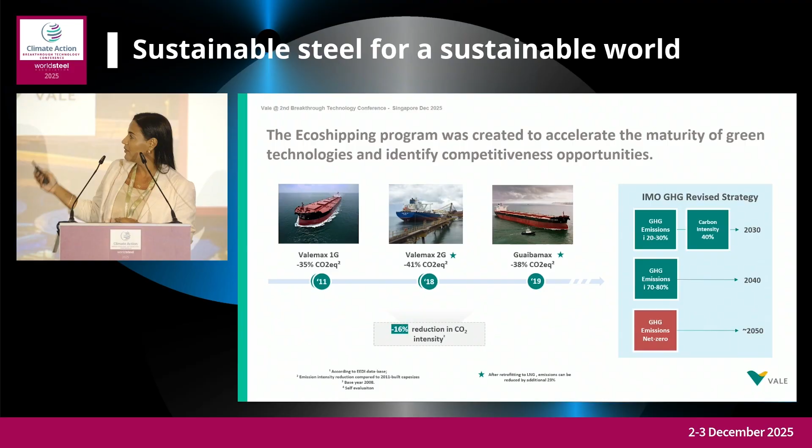A little bit more about what the Valemax is. The Valemax G2 generation, which I just mentioned, is the most efficient vessel in the world because of the scale, the technologies applied, and all the creativity and innovation we applied to the vessel. It became unique. We can look a little bit. I think here is better for me.

We have special designs on the cargo holds. This vessel can carry high moisture content cargo. The vessels have scrubbers, treating the sulfur content for a long time already. The vessels already have hydrodynamic devices that help the vessel save energy. And this is, again, a project from over 10 years ago.

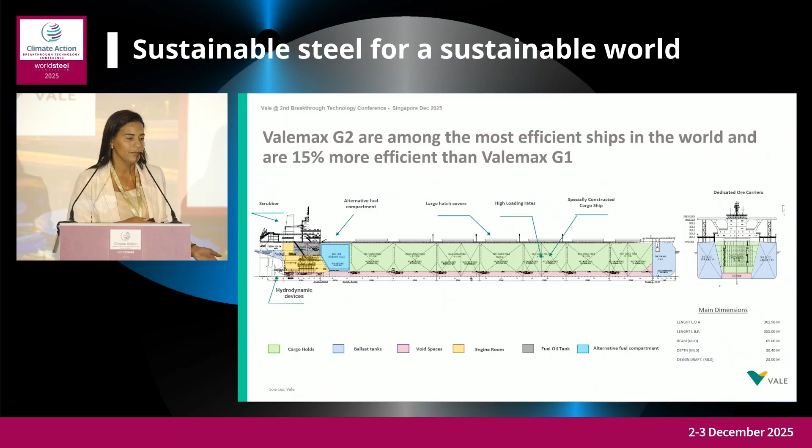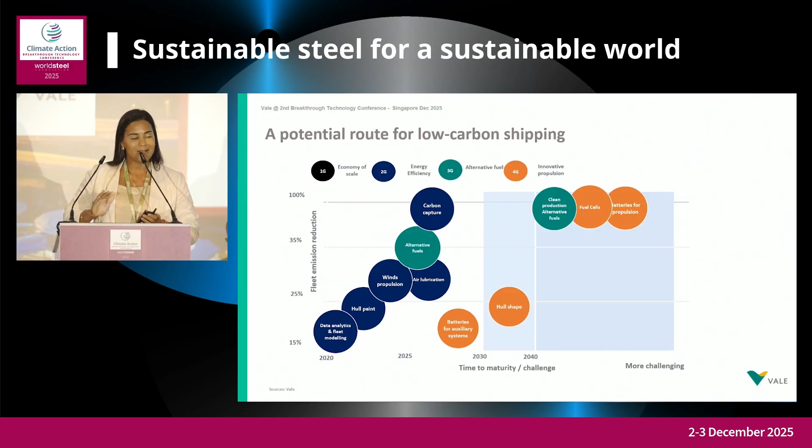And that's what the program does. The program helped us to accelerate. We wanted to push the industry to move forward, to test, to pilot, to identify opportunities and implement. And if we succeed, we scale. So that's how we actually work.

We have the phase where we work together with startups, more than 2,000 startups. From these 2,000 startups, we have selected 20 very important solutions. Then we partner with laboratories, universities, classification societies, and so many other companies. We identify all the potential technologies and their maturity level. We narrow it down until we arrive at phase 6, where we launch the pilot, monitor, evaluate, and then scale.

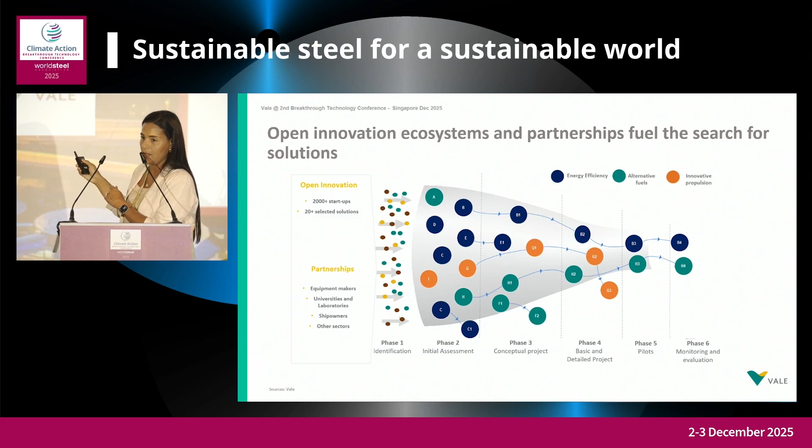So Ecoshipping has implemented pilots and collected performance data to develop a long-term strategy. We have implemented several technologies already. We have an idea, we do this roadmap I just mentioned, we pilot, we verify, we certify, we help the industry develop, and we propagate that to the ship owners to say what is worth it and what is not.

We have launched several different types of sail solutions, rotor sails, hard sails, in more than 7 different pilots. We have launched several energy save devices like propellers, PSD, VFD devices, different types of paint, silicone paint, and high-performance painting, and so many things.

Hull design - we also, in-house, have developed, in partnership with several universities, systems that help us optimize and monitor performance. I think the biggest pain point in the industry so far is that people implement technology but don't know how much this technology really influences the performance of the vessel. We have studied that for over 6 years, and we're developing in-house systems that can help us with this information, segregating all the technologies on board and isolating the performance of each energy save device.

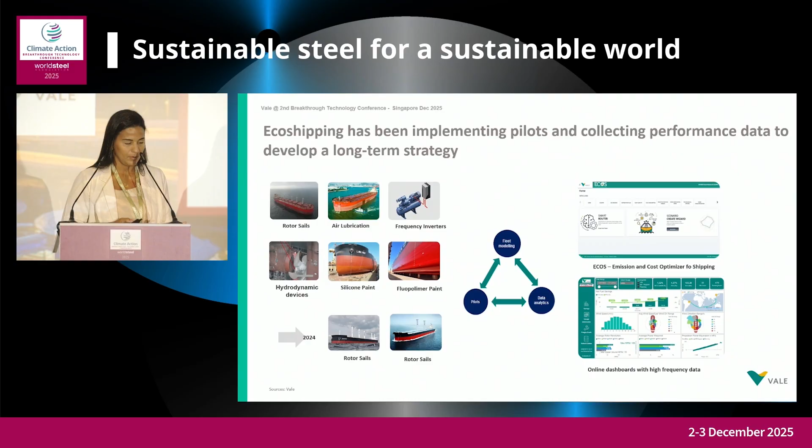So this vessel is what we call the state of the art of a ship, because we put together wind solutions, alternative fuels, and hull optimization - all energy-save devices that we tested and that don't conflict with each other. In addition, painting, and the vessel is ready for several types of fuel. This vessel comes already from the shipyard as methanol dual fuel, with extension from ethanol as well. But as Vale plays fuel and technology agnostic, we believe that everything is possible.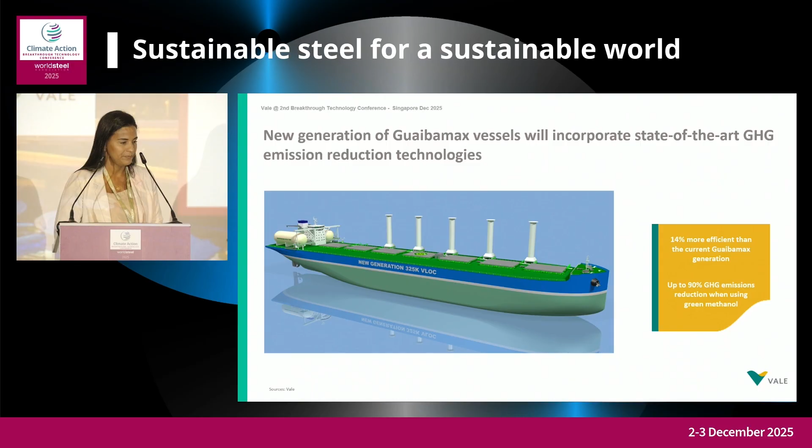So I know that everybody wants to go to the coffee break. It's been a long day.

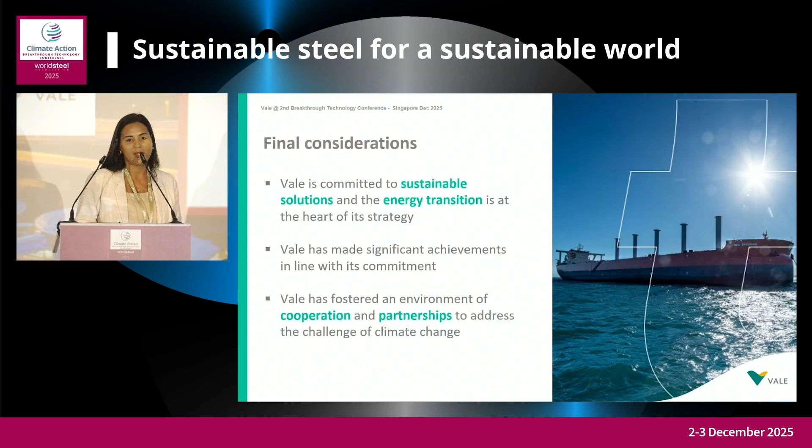So my final considerations here: Vale is committed to sustainable solutions, energy transition - it's the heart of our strategy. Vale has made significant achievements in line with its commitment and has fostered an environment of cooperation and partnership to address the challenge of climate change. Thanks so much.